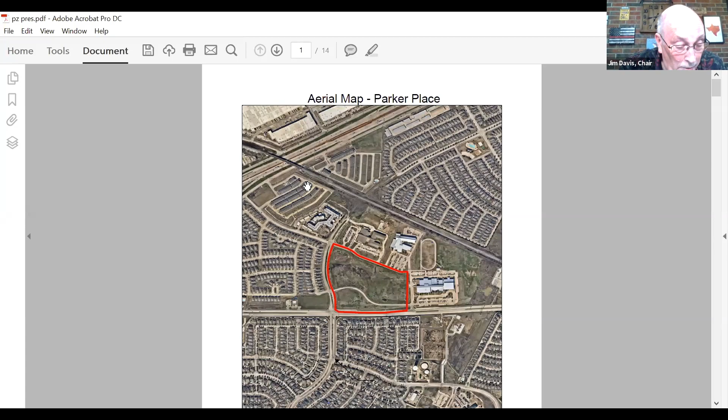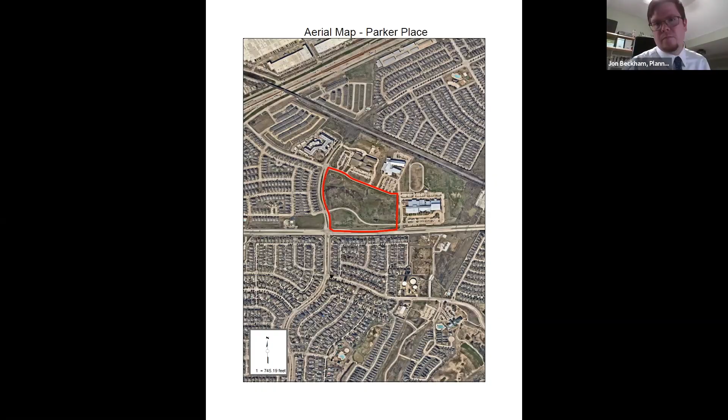Good evening, Commissioners. The Lewisville Independent School District owns a 24-acre tract of land on the northeast side of Lewisville off of Windhaven Parkway and Parker Road. The school district is looking to sell this land for a single-family residential neighborhood. Arcadia Realty Corporation, the Dallas-based developer, is looking at making this property a planned development for 131 detached single-family lots. This proposed planned development has a base zoning of estate townhouse. Estate townhouse is the zoning of the adjacent neighborhood across Windhaven to the west, so this base zoning will match the characteristic of the neighborhoods in this region. Compared to the base zoning of estate townhouse, the PD will feature smaller house sizes with a greater separation of space between the buildings themselves.

There are a number of neighborhood amenities with this planned development. The planned development features enhanced pedestrian elements.

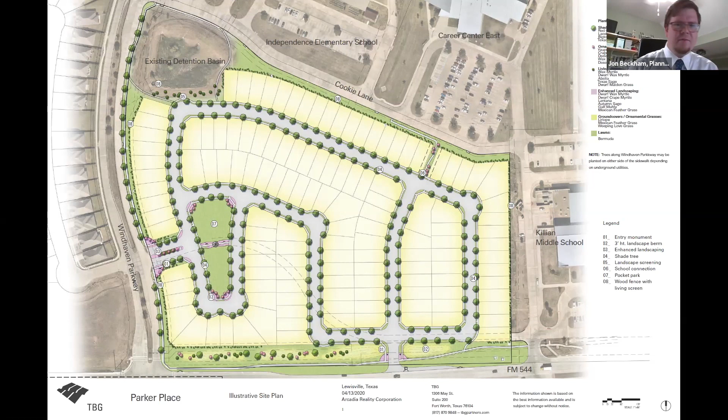There'll also be a pocket park to the neighborhood, a walking path around the existing detention basin, a path to the Lewisville ISD property to the north, a cut through in the neighborhood, as well as some enhanced entryway features to the development.

There are two options proposed for the pocket park of this development. The developer is working with the city to develop an agreement to dedicate the pocket park to the city at a later date. Doing this would offset the required park dedication fees and park development fees.

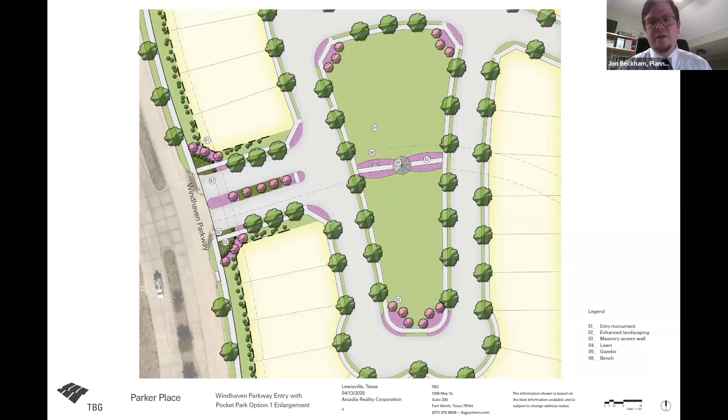The City of Lewisville has identified a park deficit in this area through the 10-minute walk to a park goal. If this park dedication agreement is accepted between the city and the developer, then the park will have enhanced features such as a gazebo or playground equipment.

As is, the park features the same street trees as well as benches and some enhanced landscape plantings at the corner.

This slide shows the enhanced entryway features as mentioned before. This is on both entrances to the development off of Parker and Windhaven.

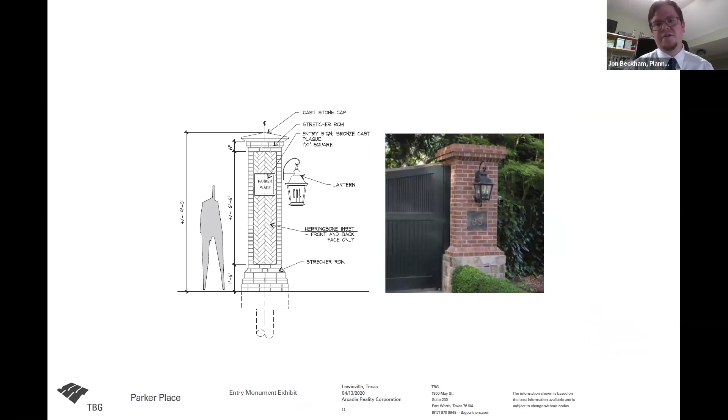They're also proposing some innovative screening design for this development. Per Lewisville's code, an opaque masonry screening wall is required completely surrounding all residential developments.

The developer is proposing to have along the eastern, north, and western edges of the property a wood screening wall with landscaping, a living screen behind that wall. This creates a softer edge to the neighborhood than a masonry wall would.

Along Parker Road, where there are houses backing up, they'll have the standard masonry screening wall. Where the residential street runs parallel to Parker Road, the developer is proposing a 3-foot tall landscape berm to create a separation there, and that paired with the street trees will create this screening for this area.

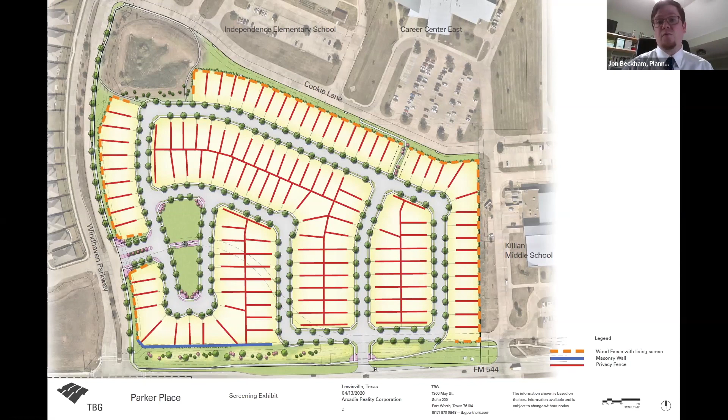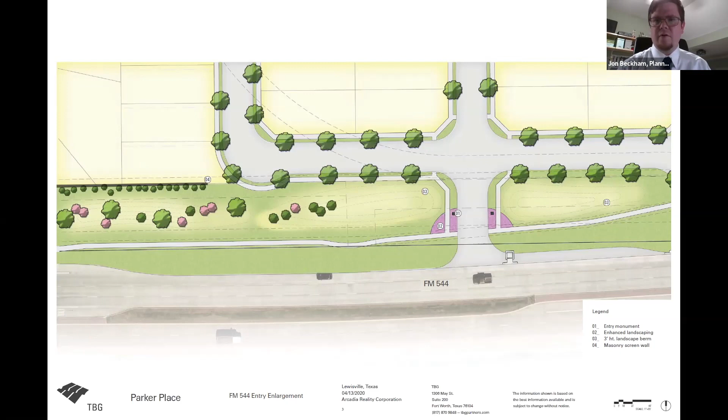There are a variety of variances being requested in conjunction with this plan development. There's a total of 8 variances.

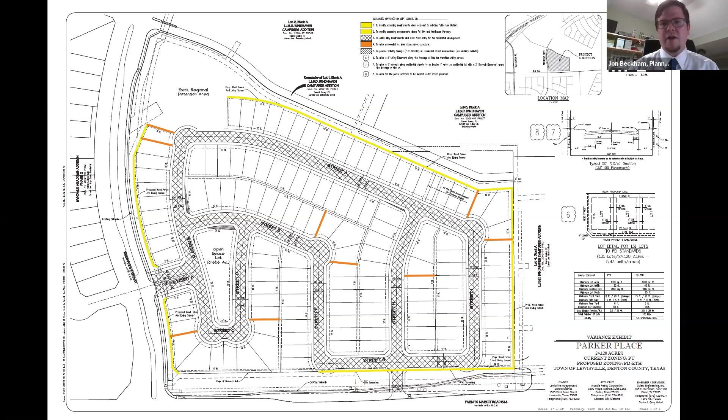These variances are required to allow the screening, to allow the front entry product, to allow the street trees, as well as variances for the sight triangles and other elements. Staff is in support of each of these variances as they're required to create the unique design of Parker Place.

As mentioned before, the street trees are proposed, and here's the street section showing how the street trees will look. We did receive a letter of support from the HOA of the neighboring neighborhood for this project, and staff recommends approval. Are there any questions?

I know the developer is here as well and can answer any questions you may have.

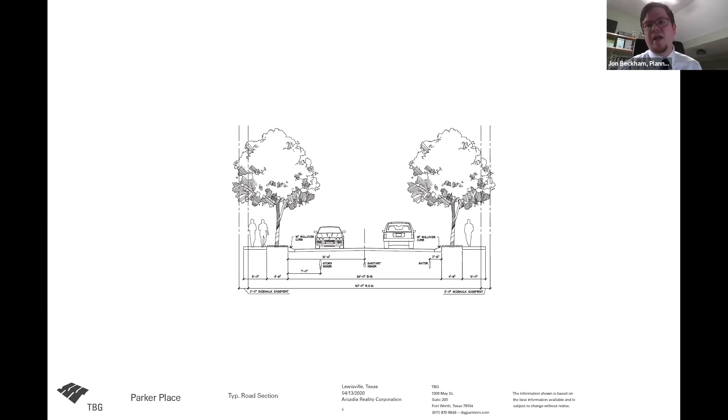Will there be an HOA? There will be an HOA, I failed to mention that. An HOA will maintain all of the parks and open space for it. And the fence? Right, and the screen wall.

Commissioners, anything else? No. No.